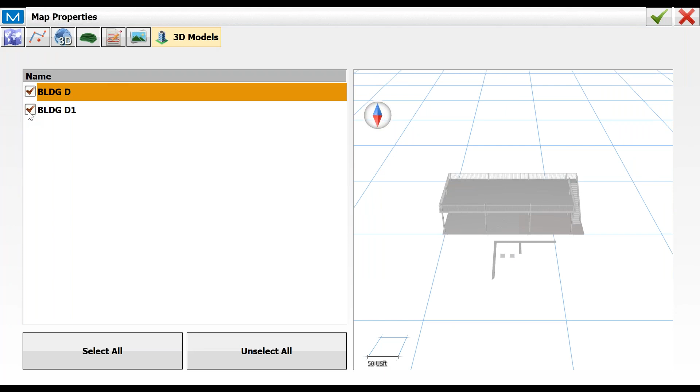Oh, see if I've got these turned off. Turn off building, bring that one in. Sorry about that.

And my system seems to be crashing right now. So let me open my other one up. And I'll bring this file back in one more time. It's always great when things crash right in the middle of a demo.

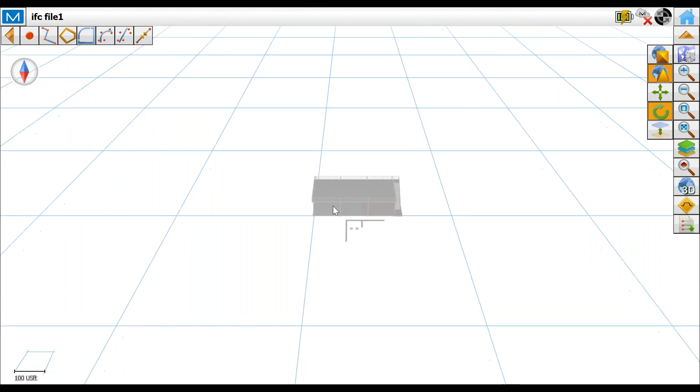Turn off 3D, turn back into 3D, zoom extents, haha. One nice IFC file. So an IFC file basically is a file with loads of elements.

So everything has got its own thing. And we could do stakeouts and layouts directly from these files. We can isolate elements, we can view them to see what it is. This happens to be a deck. So yeah, we work in IFC files and it allows us to view things in 3D.

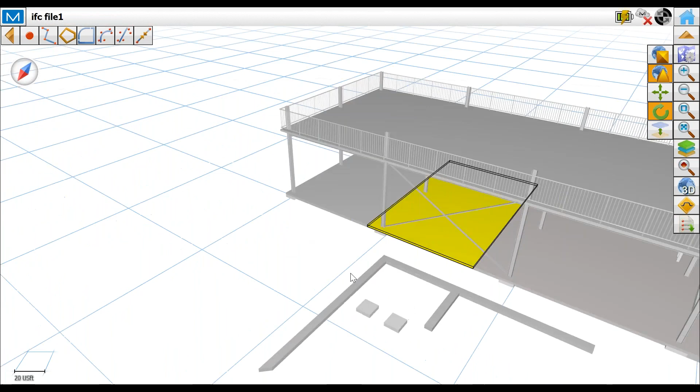So Diana, why don't you pass it back to Mark and let him take it for the drawing files, which is what most people usually work in. Thank you. Thank you very much.

So that is about the 3D properties, the model and the map properties that you can have access to and view on the map screen.

So once again, we have the general tab. We have the properties for our points and lines, the surface files if there are any, the layering, and the surface. And so when we come back in here, we put in our Bing Maps to see where the location is, which is really kind of nice so that you can see where your points are in relationship to key features at the site.

And it's very helpful to be able to have the Bing Maps. And you can have that on or off pretty quick in respect to that background image of Bing Maps.

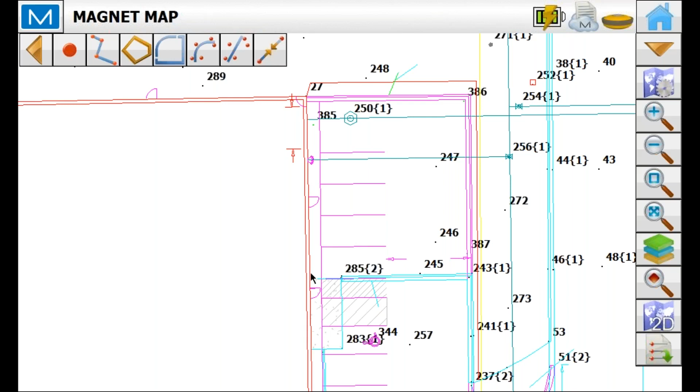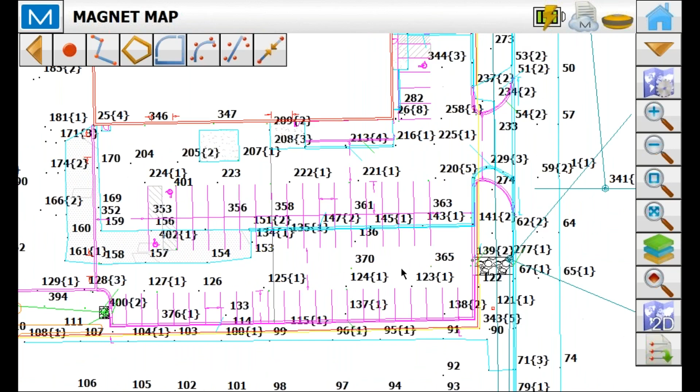So we have now cleared the surface. We've got our points, our lines, areas, things like that on this site here that we can view. And you can see also too with this parking lot modification here, it's in the magenta that is the proposed, and if we want to isolate that layer, we have our tools over here that we can do that with.

And just to give you a quick overview of all of the icons here, this will zoom in. The magnifying glass here will zoom out. We also have a window that if we go from our upper left to our lower right, it will zoom in. But one thing not in the manual, if we use right to left, it can actually highlight the points.

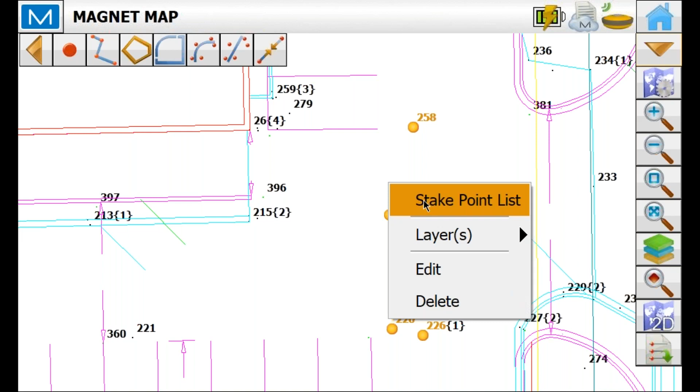If we tap and hold any one of the points here, we can actually create a points list of points we have surrounded, and it will immediately go to the points list with those points you've selected, permitting you to go right directly to staking of those points if we use that window and zoom in using from upper right to lower left. So here we are with the small group of points we've selected, and we're actually ready to stake that points list right from the map.

And if I go to stake, it takes us and shows on the map where our first point is, and we can, in this case, I'm going to zoom in. I'm going to, in my simulator, put me there at the first point.

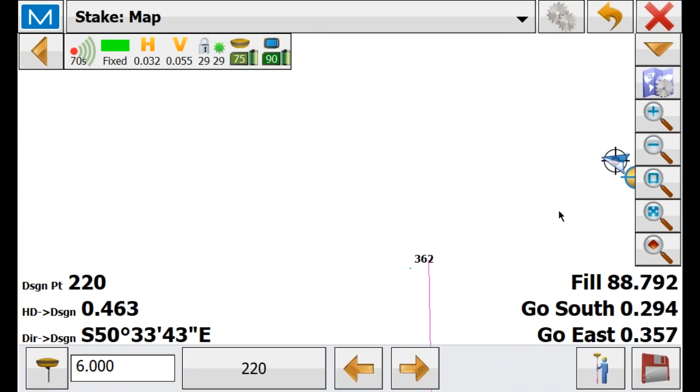And we can see the information about zooming, about where to go, where the point is, and what the fill is - the cut and fill. Let's say as an example in this screen here, which is the map screen, somebody says, well, I've got design elevations here that we want to change the information to.

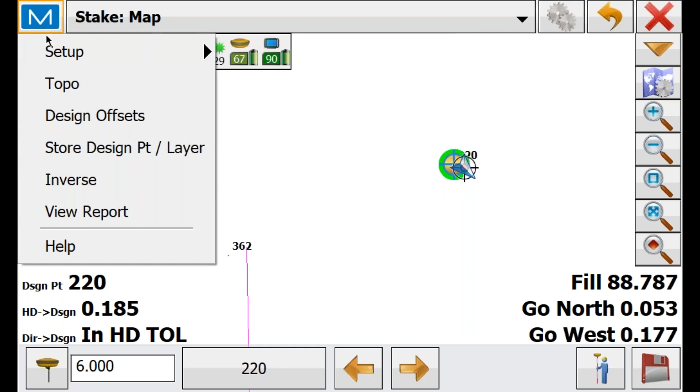We can come up to the magnet icon in the upper left, and when we click on it, we see we have the capabilities of changing the design elevation. So if I were to have a new design elevation, I could enter that new design elevation in, hit the green check, and we find that we're not only doing the staking of the point, but we have a cut and fill based on someone giving us a new design elevation.

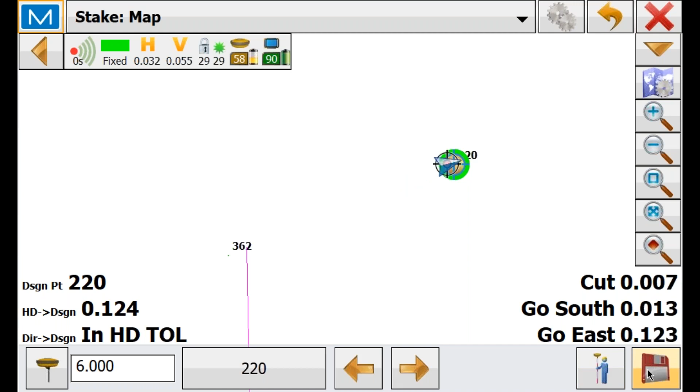So when we get to our point, we can see what the simulator is doing for us. It does act a little bit goofy here, but we're going to go ahead and store that point.

One of the other nice features about our map screen here is after it stores the point, you can review the information. After it stores the point, we'll have an icon showing the staked point, and it immediately goes to the next point that was derived from our zooming to in our window, creating a point list.

So this takes me to the next point. We walk over to it. We go ahead and stake it. We'll go ahead and finish that and accept it.

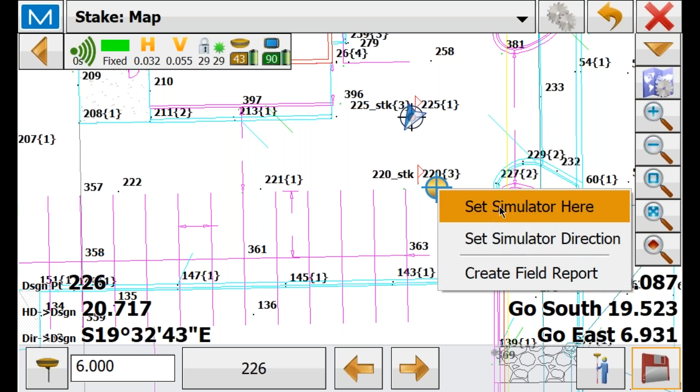And we see the staking flags go, and we can zoom to our next point, set our simulator there, click store that point, overriding the tolerances that we have set. It asks me if I want to do that.

We can take a look at what it's storing as far as staking information, and then it continues to go to the next point in that windowed selection group of points. These little flags that you're seeing will show on the map display at any time, permitting one to see what they've staked and what still yet needs to be staked.

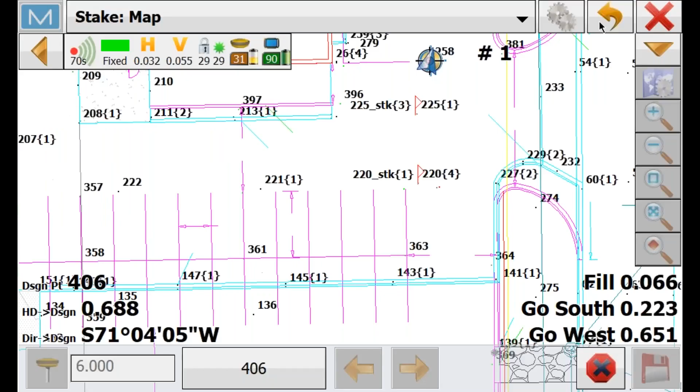So this was the last of our points that we created with our window. And when we're done, we can hit the X, we go right back to the map screen, and we can see what has been staked as a result of using the magnifying glass with the box in there.

It's twofold. Zoom in to a particular area, upper left to the lower right, and create a points list if we start from the upper right and go to the lower left. Very useful, and that's the feature there on that.

The next one is just simply zoom to extents, and that's pretty self-explanatory.

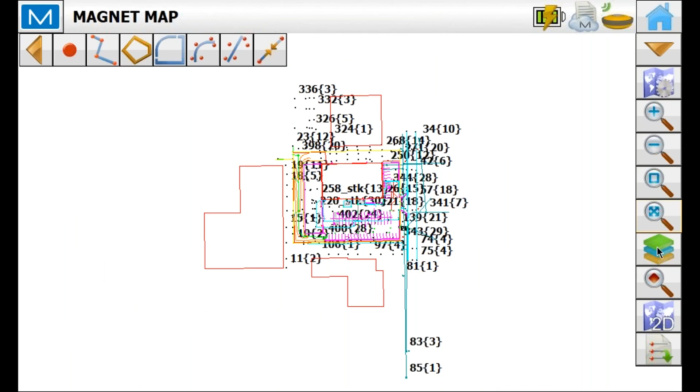So this next one here is our layers, and what we can do is if we click on the top layer, we can come over and deselect visibility of the layers on the left. One of the things in here too that not many people talk about is the ability to isolate a particular layer.

So if I were to want to select all, I could come in and turn all the layers off and come down to a layer that I'm interested in, and just isolate that layer. So let's come down here and do that one more time.

Okay. Let's go ahead and turn everything back on.

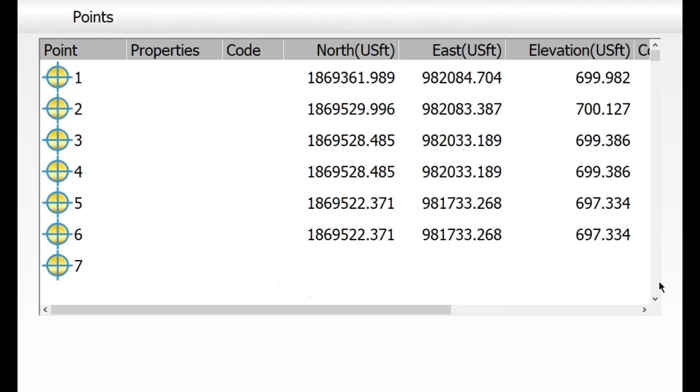And so the next one is to be able to zoom to a particular point. So if we wanted to go to a particular point and have the map focus in on that point, we have the capabilities here of finding by a range of points, by code string, by a radius, by name, layer, or from the map.

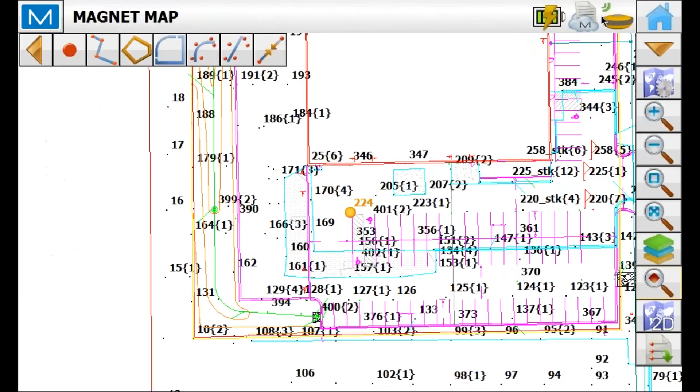So we're going to go ahead and select match the entire name, plug in the point we wish to zoom to, hit the green check, and there we are on our point that we want to take a look at and work with in that area.

We can change from 2D to 3D view here with the map view tools. This is the icon that we use to import in the data.

The rest of the icons we added are on the second page, where we can export. If we hit export, we can export the data that we manipulate. And you can see if we're going to an AutoCAD drawing, it shows you Autodesk and Topcon working together, where we actually have the Autodesk emblem when we are selecting an AutoCAD DWG.

To export out, we can go ahead and add any points list we've created to our drawing file, our surface, if we wish to. And then maybe you want to change that drawing file to the date, or add the date to it. Maybe what crew, or the name of who actually did the survey, or added to the map, or did the staking.

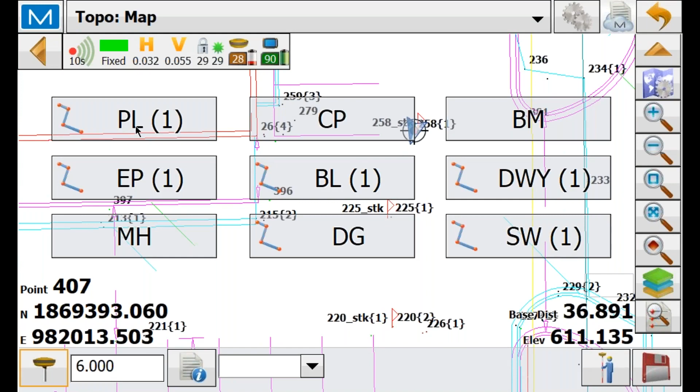If we want to start doing a survey from the map screen, we can select that little icon and it will bring us into our topo screen and permit us to utilize our quick codes that we have, so that as we're shooting in the job, we have quick access to the topo screen and to quick codes available to us.

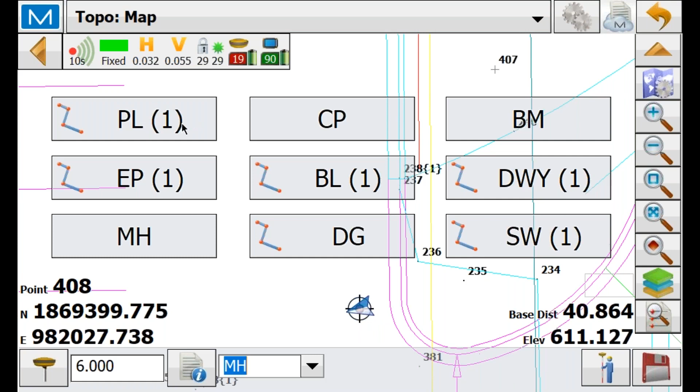As you can see here, we've been able to collect a point here just using that icon, getting us into the topo screen and having available to us our quick codes of our most used codes. You can have pages and pages of quick codes in the topo screen.

So I'm going to click back and it takes us right back to the map screen here. After getting into the topo screen, this is where we can, in the map screen, show where we are at. It'll isolate that for us.

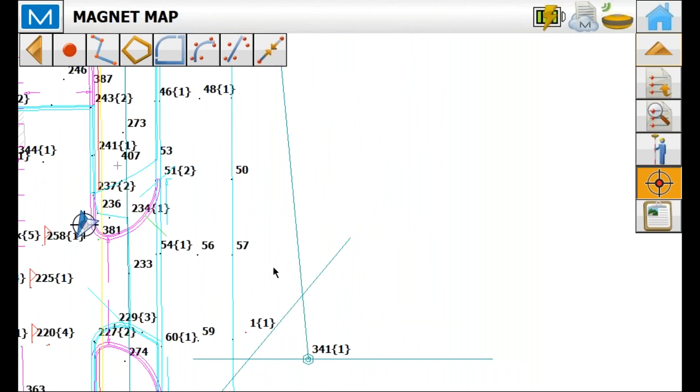If we move it around, it'll snap back to where we are on the map. And if we unselect that, it lets us move around the plan like a sheet of paper on your desk. That would be primarily it.

If we're generating field reports, they will be here. And that leads me to the next step, which would be to show you a little bit about the pop-up menus that you have available to you. If we were to click somewhere on the map, we can say we would like to create a field report, and that's by clicking anywhere on the map screen. When we do that, it will create a field report.

You can name that report and who it's created by. It'll show you a sketch of that map screen. We can add photos, we can get photos from a file that maybe we've taken with our controller. We can add new sketches. This is useful for, let's say, we want to put a timestamp on that sketch along with a location.

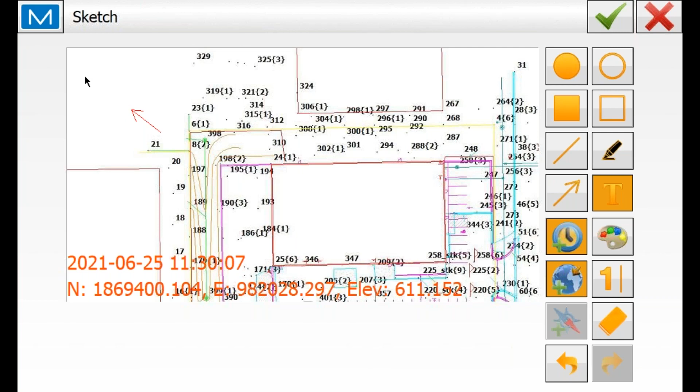We can choose that. If we want to add notations to a particular area that may need more information, we maybe want to draw an arrow to a particular area and write text about what we want to do to a particular area and have that information.

And when we save it, that is down here in the map tools. And on the very bottom, we added it in for later. We can view that report, send it in, and have notes of what we see while we're out on a particular job.

Yeah Mark, I want to add to that. Those field notes are kind of nice because they're basically screenshots. So when you're seeing things in the field that need to be changed or sent back, it allows you to take a screenshot, edit that screenshot, annotate it, add pictures, and then send it out as a PDF back to the office, either through Enterprise or any other way, for either somebody else to review or anything along those lines. It's kind of a nice hidden feature.

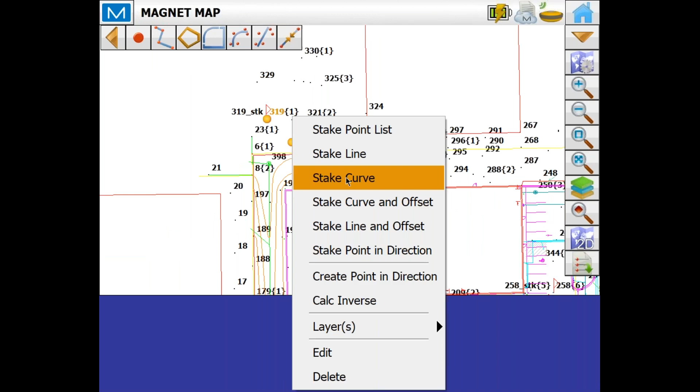If we select multiple points, let's say 2, we can stake that points list, stake a line, stake a curve, stake curve and offset, stake line and offset, stake a point in direction, create a point in direction, or calc an inverse—that's added here. This immediately allows us to do an inverse between those 2 points, show where it is on the map, and also input other information for inversing additional points from either one of the points you selected.

If we are doing 3 points, the pull down or pop-up menu changes once again, where we can create a plane, stake a points list once again, or do a corner angle calculation—that's added to the capabilities of selecting 3 points. And there you have just a few points or more.

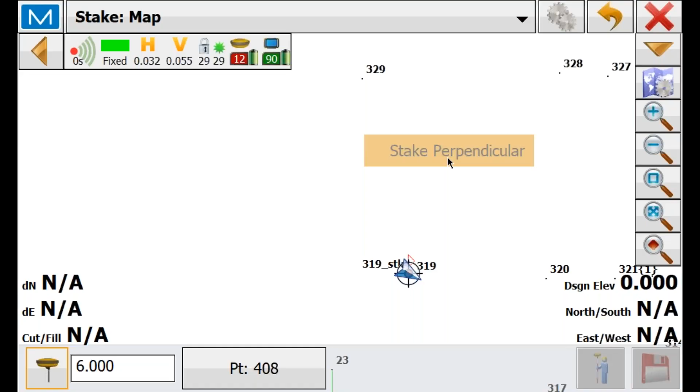If we select a point and we want to select a line, we now can stake a perpendicular between the point and the line. That permits us to stake the perpendicular where the point is going to fall on the line.

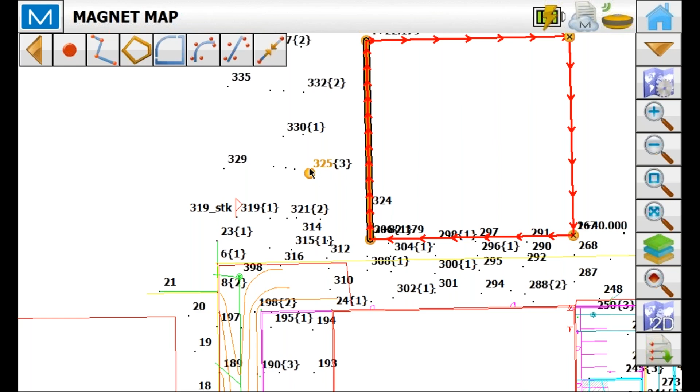If we select different entities, it's going to let us do some additional things in our pull down menu. And so that's what you can do with a point to a line.

If we want to just select line work, we can stake the line work, calc the area, stake a slope, generate a line work report, reverse the direction in a line, corner angle computations, calculate vertical intersections. We can create points on that line and show information about that line.

In this case, let's say we want to create points at our corners of this particular building. All we have to do is tell the data collector we want to do that, hit next, and hit the green check. We've created 5 points, and so we have the points on the corners of a building.

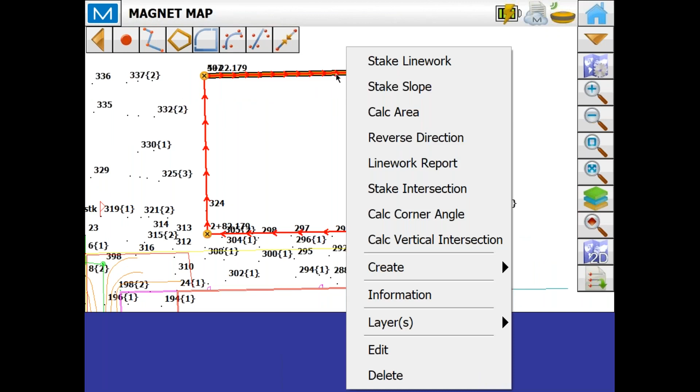Let's say we want to create offset points. We can go to corner offset, tell it the distance of our offset points we want to create, and we've now saved our offset points. Now we can see we have our 10-foot offsets on the corners of this particular building. That's a nice feature to have right in our map screen.

So the pop-up menu is very useful, and depending on the elements that you select, the pull down that you'll see when you hold your stylus down on the screen is going to give you a lot of different capabilities that many may not know. Hopefully that helps, and the pop-up menu is a very useful tool.

The next thing we'd like to cover is going to be our drawing toolbar here at the top. We have the ability to create points, lines, through points. We can draw an area or a boundary. We can also do fillets here. We can do a best fit line to create curves on points, best fit lines, and we can join two lines together.

As an example, if I wanted to create a point, I could simply click on a line using the snap mode, and it lets me create a point on a particular line. If we want to come over to the snap mode and say we want to put a point on a center line, this permits us to do that. This will create a radius point. This will let us put a point on an intersection.

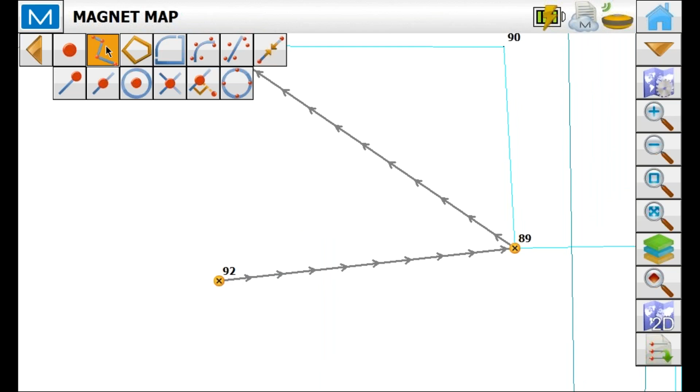In drawing line work, this is where we can simply click on points to create line work between those points, and then by clicking on the line work icon again, we can save that, what we've done by using the snap mode.

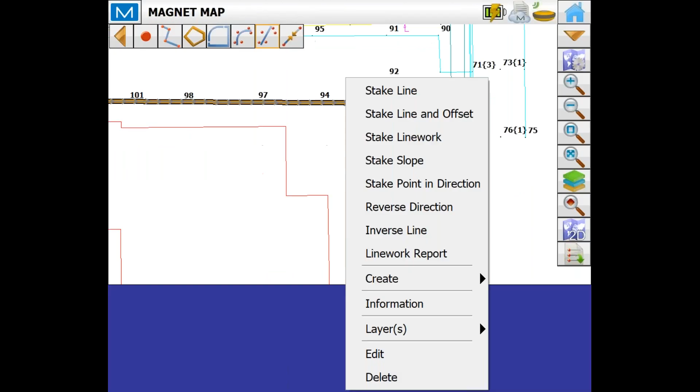One feature I think is nice - I get a lot of surveyors who want to do a best fit line over property pins they've shot along a street. If we have a set of points and want a best fit line through them, using this command we can select our points, highlight the ones we want, uncheck that box, and we get a best fit line generated. You can then highlight that line and stake it. I think that's very useful.

Hopefully you get some good information here that you can use with that tool. So in the stake map, we can just hit the X and we're right back to where we were.

The last one I'd talk about, in terms of importance, is a best fit curve. What we can do is much the same - we don't need to worry about the snap mode, because we can highlight the points we want to do a best fit curve through. I'm just pulling out a few points, and now when I uncheck the box, we have a best fit curve through a series of points. That is very useful.

So these are some of the things you can do with the drawing toolbar and the snap mode.

Lastly, in any screen you're in, if you need help, we have our magnet icon in the upper left where we can go to our help, and it will open up our help menu in whatever screen you may be in. So in review, we can come into our help menu and go over all of the features and benefits we have in Magnet Field Maps. You can click on any of these items here to get more details about them. Just remember, a couple of the things we went over are not, in fact, in the manual.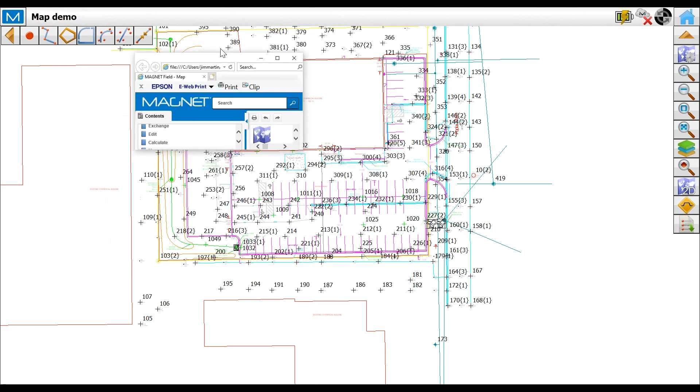There we go, a few other things to go over. Let me roll this over here. This is very typical of what happens when you open it up on an FC 5000 - it'll open up this browser, and it might be kind of small, so you just open it up and expand it out or maximize it. Again, it's very dependent on what your default browser is on that FC 5000 or 6000, but it usually likes to open up Internet Explorer.

And then it's usually pretty smart, so anything you want to learn about pretty much anywhere in Magnet Field, not just the map screen, there's going to be something in this help menu, and it's generally pretty smart. So if we're working in the map screen and you hit the help menu, it'll pop up in the help portion of the map screen.

So I want to cover a couple other things in here - that layering. It's always fun doing these demos, these presentations, because you miss and forget a couple things, so I wanted to show that layer thing Mark was working on, turning layers on and off. Mark, I think you had that layer locked, and that's what was getting mad at you. But if you go into your layer menu here, let's go through and turn everything off again.

So we're going to right click, which on an FC 5000 or 6000 is pressing and holding, and that's when you get the pop-up menu. So we'll select all, turn them all off again, and I'm going to go back to that one you were working on. Turn it back on, it'll just turn on that layer.

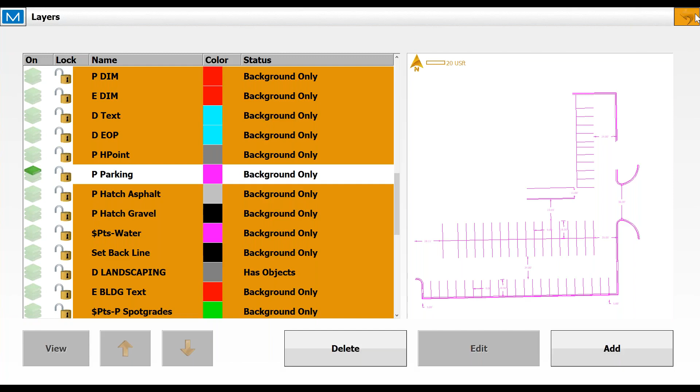So turning layers on and off kind of works back and forth, and this is how you do it. So when I go back, now all I've got is that layer and the lines that are on that layer to work in. So let me turn them all right back on. I'm going to right click or press and hold, select all, turn them all back on, go back out, and there they are. Thank you, Jim.

And then the other thing I discovered I was doing wrong before with that IFC file, the IFC file is a 3D file. So I was trying to look at it in 2D, well, it wouldn't show me. But you can switch back and forth from 2D and 3D with this button right here. Very helpful when you're working in surfaces.

So if you're looking for a surface and seeing where things are convoluted or wrong, what happens a lot in surfaces is whoever designs it forgets and leaves a 0 point in, so you got this big dip, or this one point that's really high, so you got this big peak. Well, they're tough to see when you're looking top down. If you flip it in 3D, which this file does have some 3D elements, but it gets a little goofy because it was originally designed as a 2D file with just some 3D elements that are really high or really low.

And looks like it's going to crash my computer, which is, you know, I think most of us are probably working from home with this pandemic stuff. So every now and then my internet gets a little mad, makes my computer mad. So we're crashing this one right now.

Diana, what? There we go. Yep, so my computer completely crashed. I see we do have a question, I believe. Diana, will you? What have we got in there?

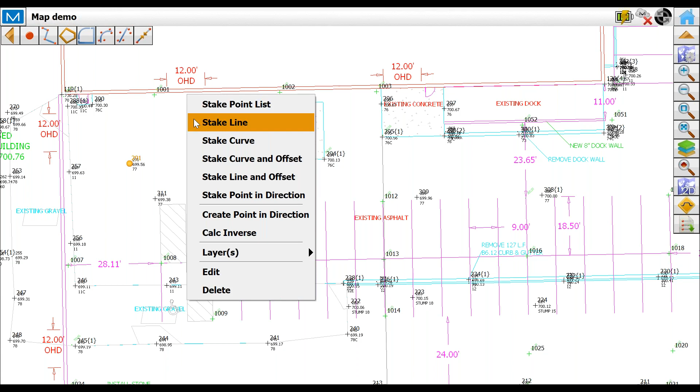The other thing is, as Mark was pointing out, your pop-up menu is dependent on what you have selected. So as he showed before, I have a single point selected here, so I'm going to do my pop-up menu. I have these choices. Well, if I select 2 points, my pop-up menu totally changes because I have a lot more choices that I can do. If I have 3 points, it changes. And if I have 4 points or more, I think that's where it changes, is at 4 points or more, it changes. One of the things is this calculate a vertical intersection.

Let me choose some points that would make sense here. I'm going to choose that one, that one, and then this one and this one. Now I did that in a very particular order. Let me calculate the vertical intersection. And what it does, it takes those 4 points in order, takes the grade from point 1 to point 2, and then extends that grade towards point 3. It takes the grade from point 4 to point 3 and extends that grade to point 2, and then finds where it intersects. So this is the intersection of this grade going this direction and this grade going that direction, of where it intersects. Really helpful in the roading routine.

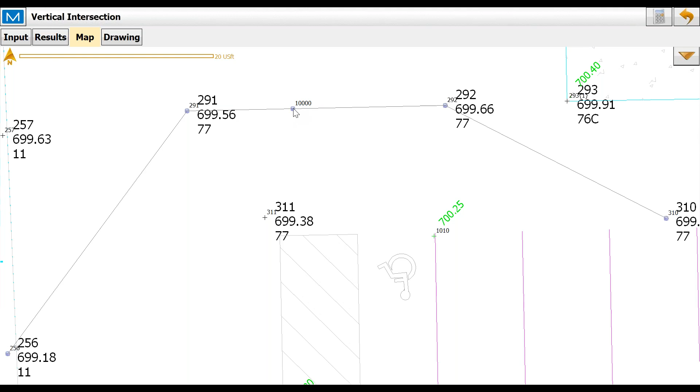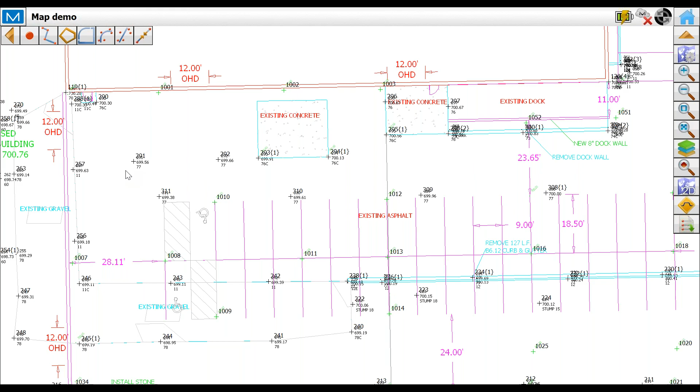So again, that was having 4 points, and it is very particular on the order that you select. The other thing was lines. If you want to stake a line, it's going to tell you whether you're left or right of the line, and that is dependent on the direction of the line. Well, if you want to change the direction, we can do that on all lines.

So let me find one that's got direction on here. Or here, I'll draw a line real quick. Let's go from this point to that point to that point to that point. So you can see it's giving me the arrow of the direction I'm drawing that line in. Well, so if I want to stake this line this way, over here is the right of the line, this is left of the line.

But if I do my pop-up and reverse direction, as you see, the arrows go the other direction. So now this becomes right, this becomes left. And sometimes this really helps out when you're staking - what are you staking? Do you want to stake in a particular direction? Does it make more sense for your rod guy to be on the right or the left? So there is an ability to completely change the direction of the line.

Let me pull my notes up here and see if there's anything else major that we missed. I think that's pretty much it. Do we have any other questions?

I see one more popped up. Diana, what's that other question there? So there's a question that came in that says, does the background map feature support custom WMS in lieu of Bing Maps? Absolutely. So if we go in here, these are my choices, we can set it, and you can edit, import your own maps, create them. So yes, it does support them.

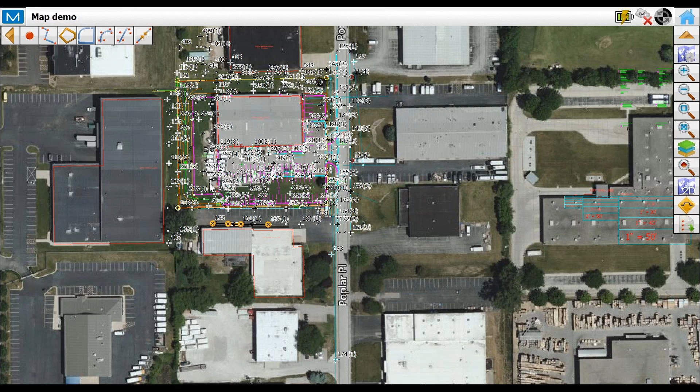And I think that's a lot of the major things. Mark, is there anything else we needed to add? Well, no, I think some of the things that I went over were actually questions that I get routinely from new users or people that haven't used it before. They want to know where a particular feature is. So I tried to give bullet points on some of the most used features pertaining to the questions that I may generally get.

Absolutely, yeah. And a lot of this is things that we've seen people work on, things that I did when I first started working with it, things I still do occasionally. Like right now, I've got this line and these points selected, and I want to start working with something else - well, I forget to unselect those lines. So I just double click somewhere else and now it's unselected. Or if I'm drawing lines like here, and I draw a line, draw a line, draw a line, and then I want to go do something else, I forget to get it out of line drawing mode. So I got to remember to do that, and then I can start working somewhere else.

But just the little tips and tricks that Mark and I have learned working with this. I really like the map screen because it's incredibly powerful with things you can do. And hopefully that helps everyone do their job a little better, be more efficient, and work with Magnet Field that much better.